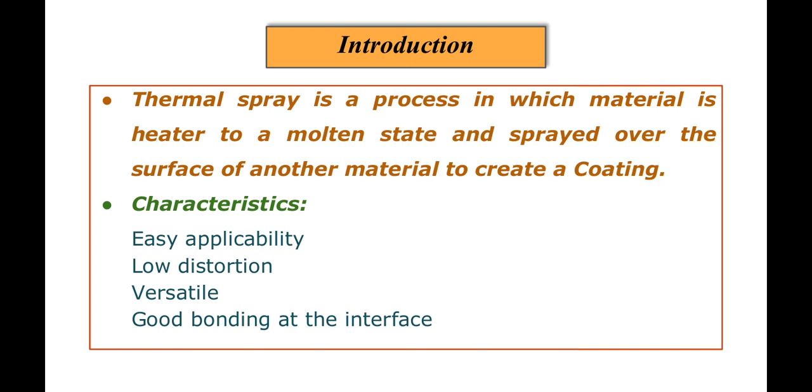This technique is versatile because it can be applied to a wide range of materials, from polymeric material to high melting ceramic material, and deposition speed is very fast. There is negligible heat affected zone. The process is very environmentally friendly, with superior coating properties, low substrate distortion, and much more economical compared to high-end processing like laser or electron beam processing, and it is capable of deposition on heat sensitive material also.

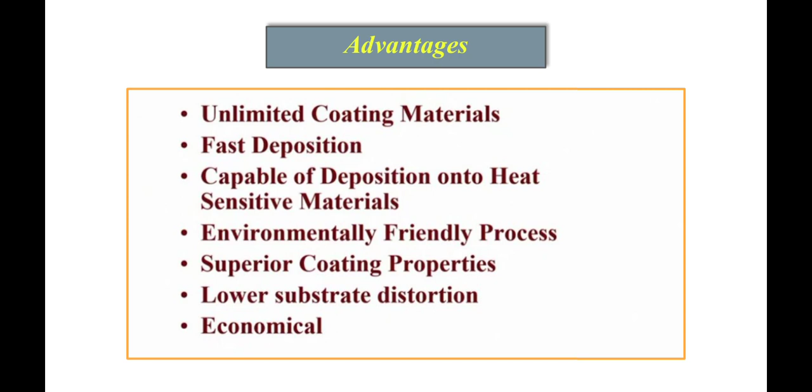This process is a very unique process, and you have to choose the process parameters as well as the process technique in terms of heat source carefully, so that you get the desired coating onto the surface of the substrate. Now let us discuss the classification. According to the different varieties of thermal spray deposition techniques available, you can broadly classify them into four categories: flame spray deposition, electric arc spray deposition, plasma spray deposition, and kinetic spraying.

As the name implies, in flame spray deposition you use an oxyacetylene flame as the source of heat, in electric arc you use the electrical arc as the source of heat, and in plasma arc you use the plasma arc as the source of heat. On the other hand, in kinetic spraying you do not use any heat source for melting. It is also known as the cold spraying process, because the material is in an unmolten or maybe semi-molten state; you avoid overheating of the powder so that there is no degradation of the powder.

This kinetic spraying technique is mostly applied for the deposition of polymeric material or nanostructured material, where there is scope for degradation of the microstructure because of heat. Now if you talk about the sub-classification of flame spraying, you will find that the sub-classifications are based on the way you use the precursor material. It may be in the form of powder, wire, or rod.

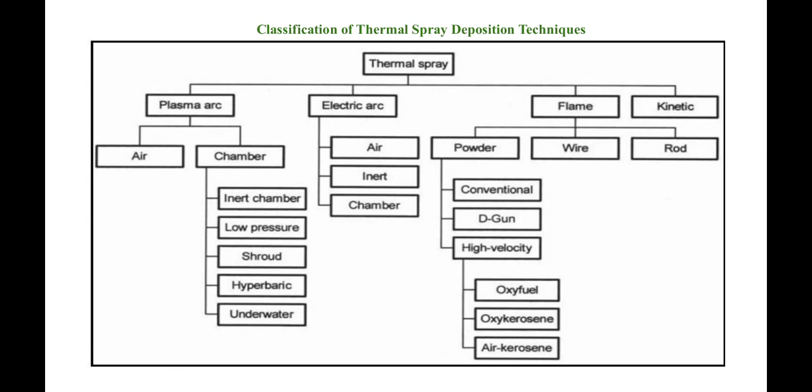Now if you quickly go through the technique in detail, you will find how the spraying is done. This is a typical spray torch where you can basically use any heat source. So here I have shown the torch, and in the torch you inject powder, and the powder particle size usually is 45 to 60 micron.

And if it is too low in dimension, like if the powder particle size is submicron, then there will be a problem of agglomeration of particles, and a problem of flying of the particles. So usually most heat based processes use microsized particles of the order of 45 to 60 micron dimension. And if you are interested to use nano sized particles for spraying, you have to agglomerate them and subsequently spray dry them to make particles of that size.

And certainly nano size particle does not mean that the powder particle size is nano; it is the grain size or crystallite size that is in nano dimension. So your particle may have nano sized grains and crystallites. So the particle is actually fed or injected near the tip of the flame, and then it is melted.

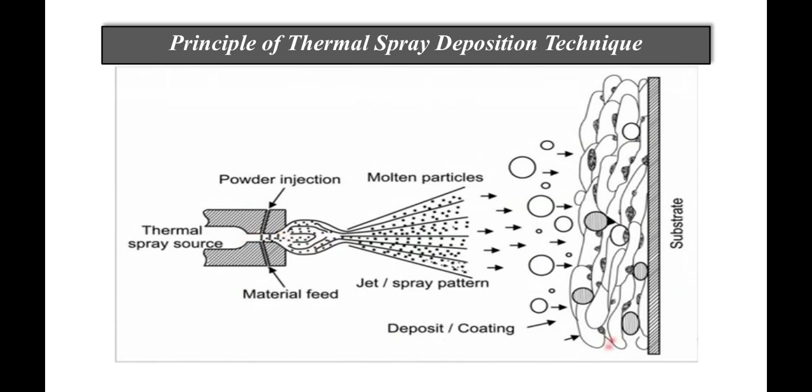You can see here the molten particle, and with the help of high velocity oxygen, or high velocity inert gas or high velocity nitrogen, it is propelled and subsequently spread over the surface of the substrate. Okay, so this is about the principle.

Now if you quickly see the parameters in this particular process, the parameters are the nozzle to substrate distance, the velocity of spraying, the kind of heat source you are using, as well as the powder particle size. These parameters play a very important role in determining the microstructure as well as the composition distribution of the coated layer, and subsequently its properties also. So I have mentioned in this slide some parameters.

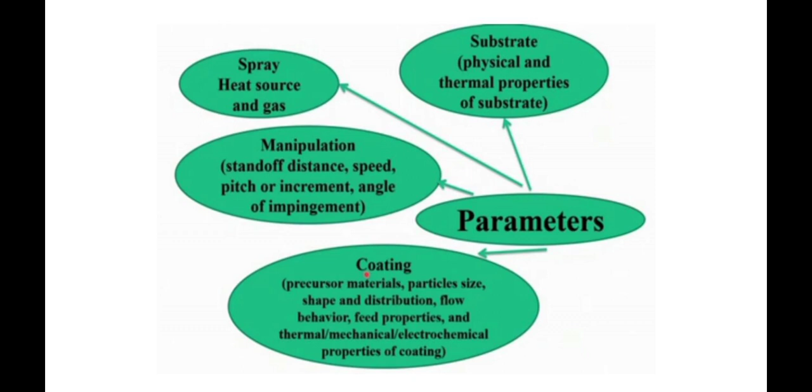Now let us quickly go for the applications of this technique. If you go through the different applications of thermal spray deposition, you will find it can be applied for deposition of a wide variety of metallic particles like iron and steel, nickel, chromium, cobalt. It can also be applied for coating of carbides, then oxides,

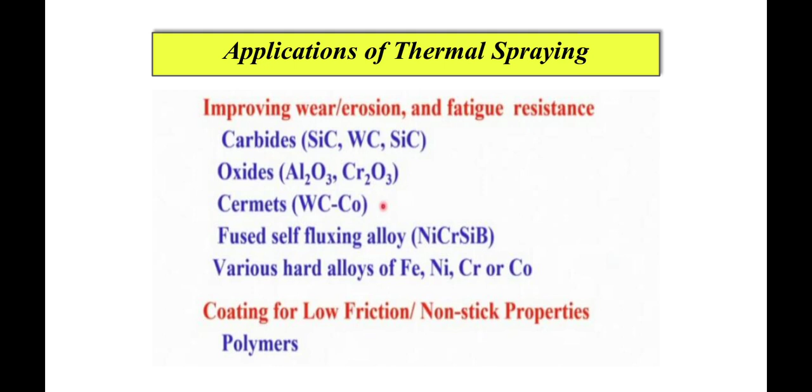then ceramics and metal matrix composites, and it can be applied for the deposition of self fusing and self fluxing alloys like nickel, chromium, silicon, or boron also. And kinetic spraying can be applied for polymer coating, and for corrosion resistant applications like anodic coating, zinc coating, cathodic coating, then stainless steel, tantalum coating, and coatings like aluminum

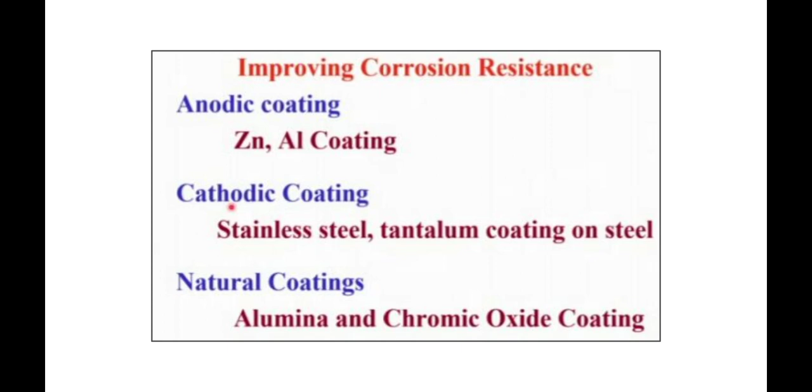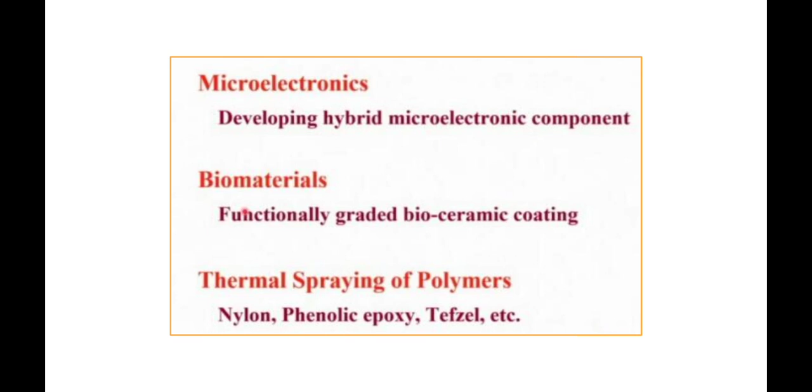and chromic oxide coating. This technique may also be used for applications like microelectronics, biomaterials, or polymeric applications for improving the non-sticking property. So these are the applications of the thermal spray technique. Okay, so this is about the introduction to thermal spray. Thank you.